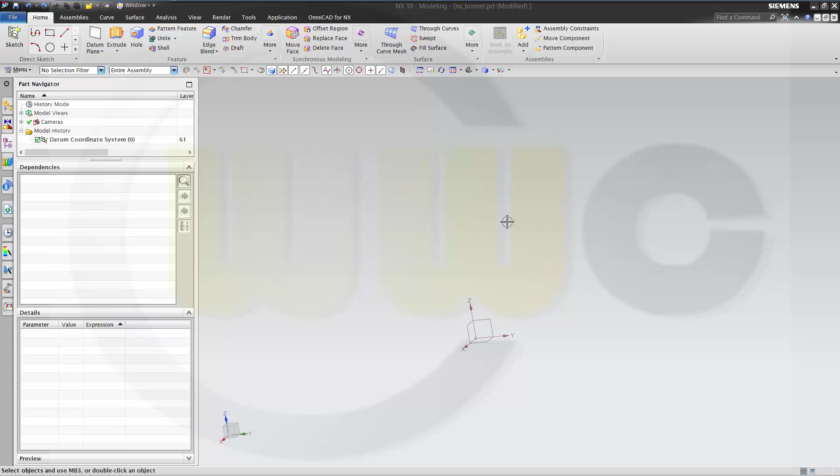At first I need some reference planes to make things easier. So the first one should be with a distance from this one, and the first distance should be

maybe 10. Apply. The next one should be the distance from this one, 12.5, and another one from this one, 10,

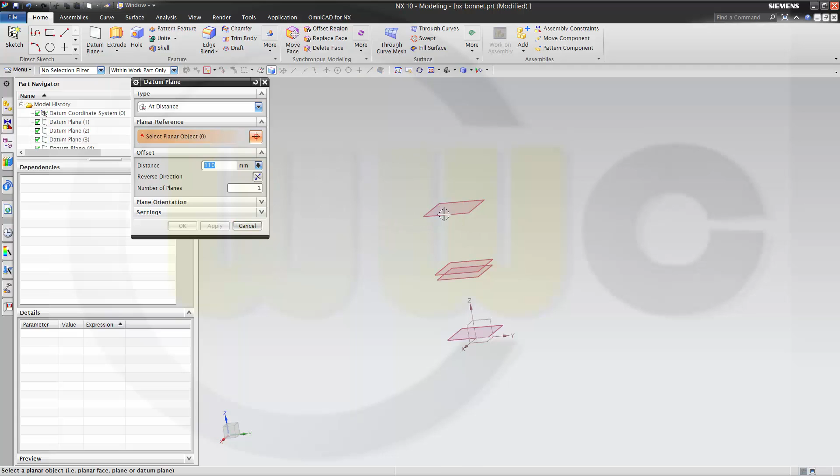and then the next one is 110, 10 again, and the last one 17.5

from this one. And okay, I could put all these in a feature group and call this ref planes.

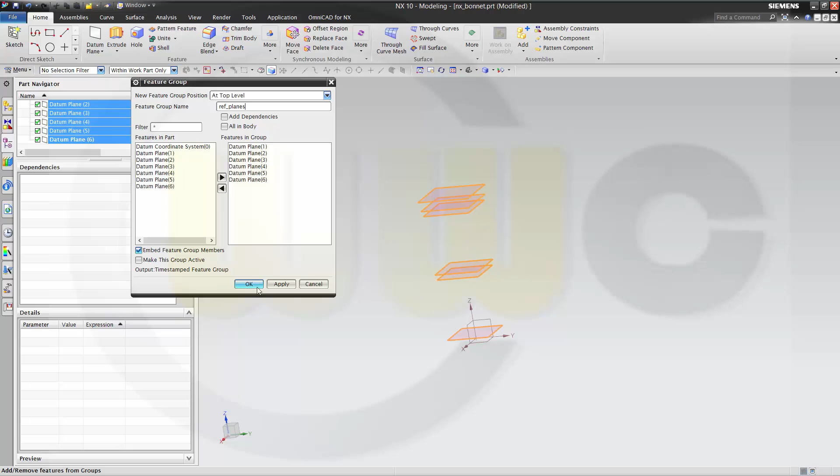Okay, next I need some sketches. Let's make a sketch on the XZ plane.

Okay, and this should be an arc, and it looks something like this. Maybe like this. Okay, then add some constraints.

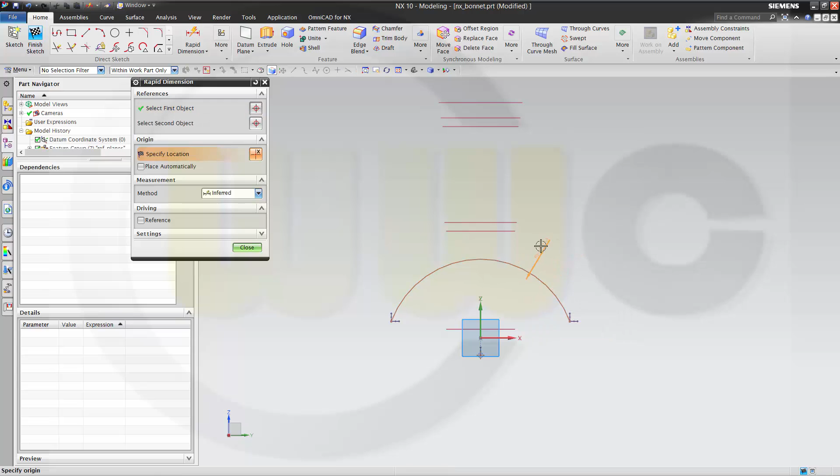So this should be aligned to the axis. Okay, and the radius should be 90.

And the center point should be on that plane, coincident. Okay, now let's move this a little bit down like this. Okay, and add some constraints from this point to that plane, coincident, and the same on this side.

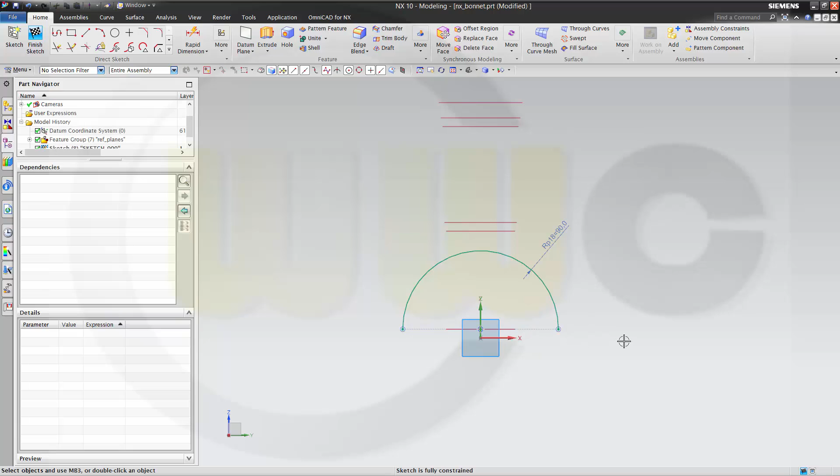Okay, finish the sketch, make an extrusion with a sketch,

make it symmetric, and it should be perhaps 80. Okay,

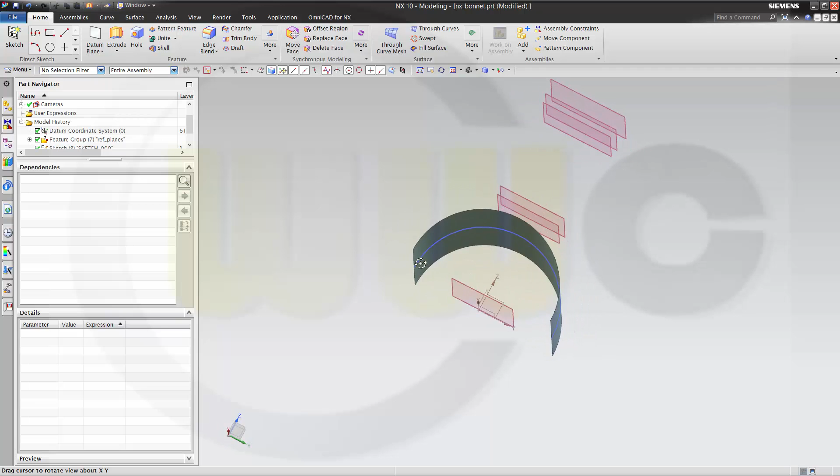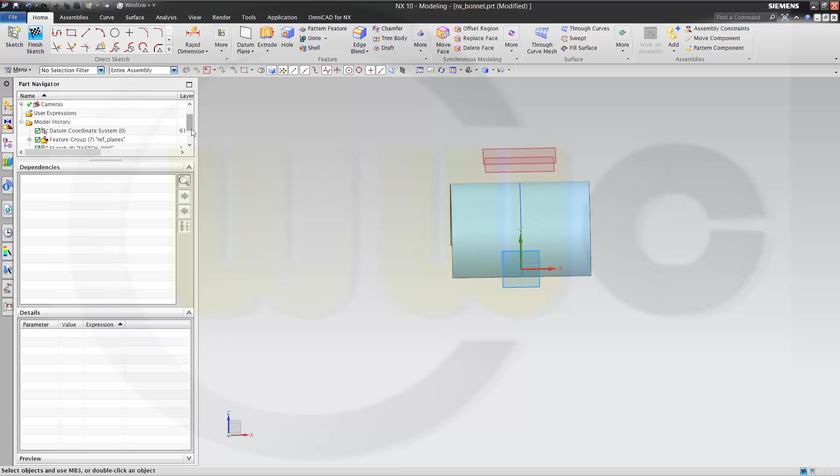another sketch on the XY plane over here. Okay, another arc. I could hide this one for the moment.

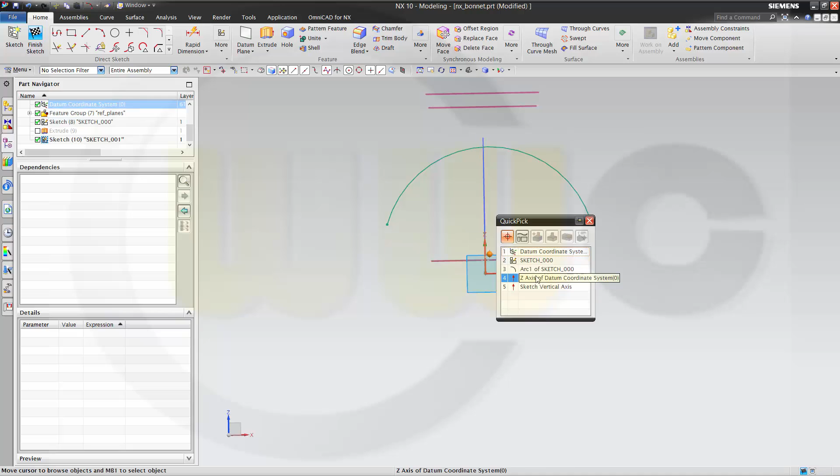Like this again. This center point should be aligned to the axis, coincident.

The radius should be 85. The distance should be from this point to that plane, 5,

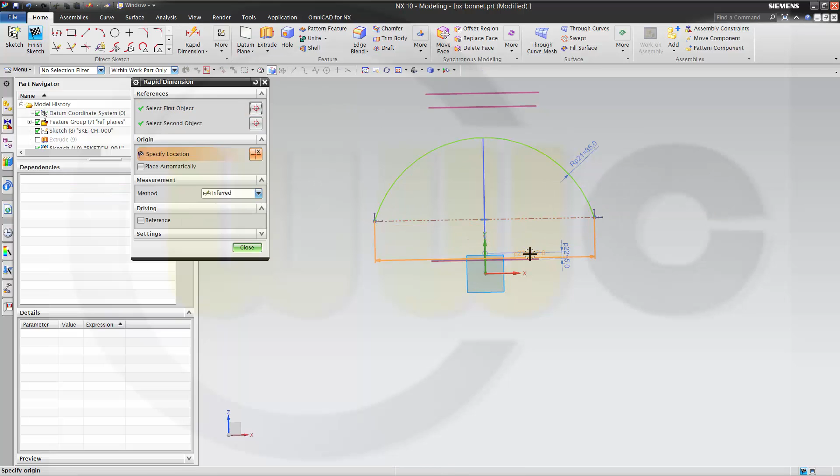and this should be fully constrained, so let's make a line like this, set it to construction and give it a dimension, maybe 30, that's okay.

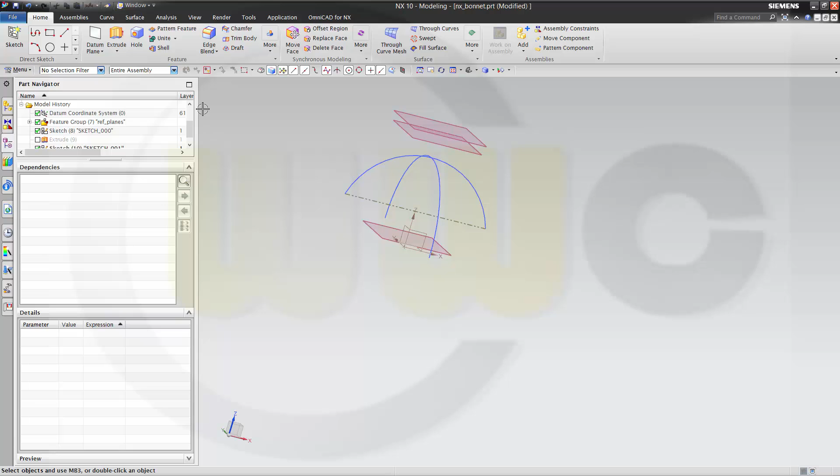Close this one, finish the sketch and make another extrude with this one.

Make it symmetric and make it 200 altogether. And okay.

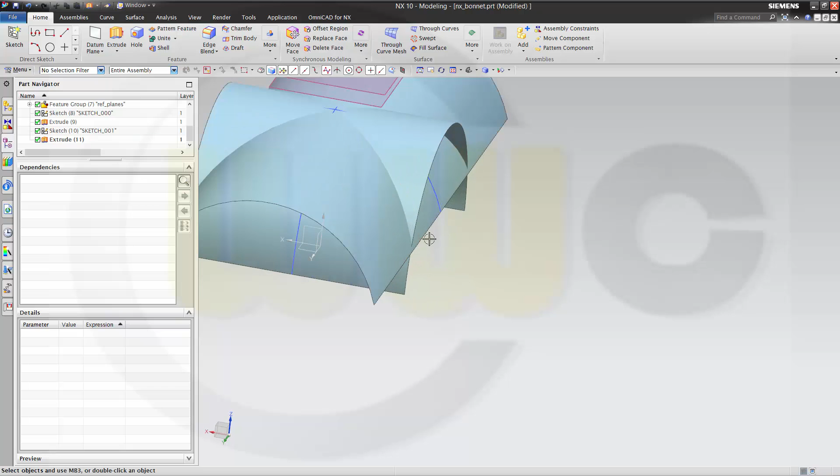Let's show this one. Just take a look, that's okay. Okay, another sketch.

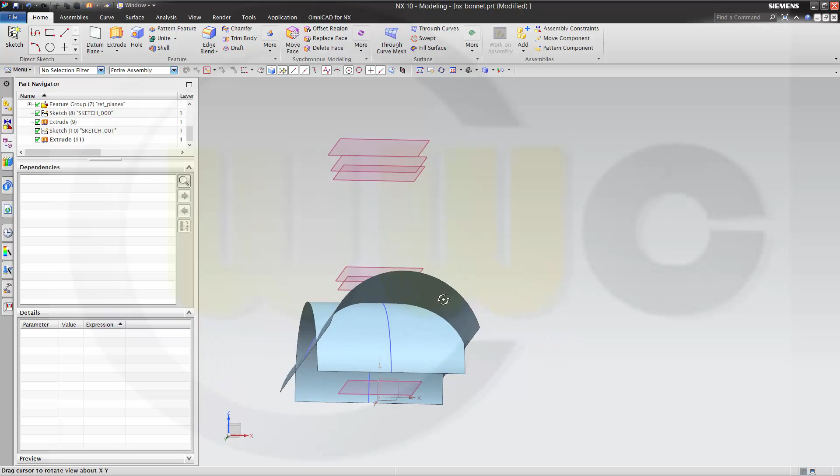Let's take a look. Should be on that plane, on the ZX plane. Okay,

and this should be a line, maybe like this. And this point should be on this axis.

There should be an angle between this axis and the line, and this might be 10. No, not 10, but 80, sorry. Okay,

and the distance should be 60 from this point to that point. Or 70. Okay.

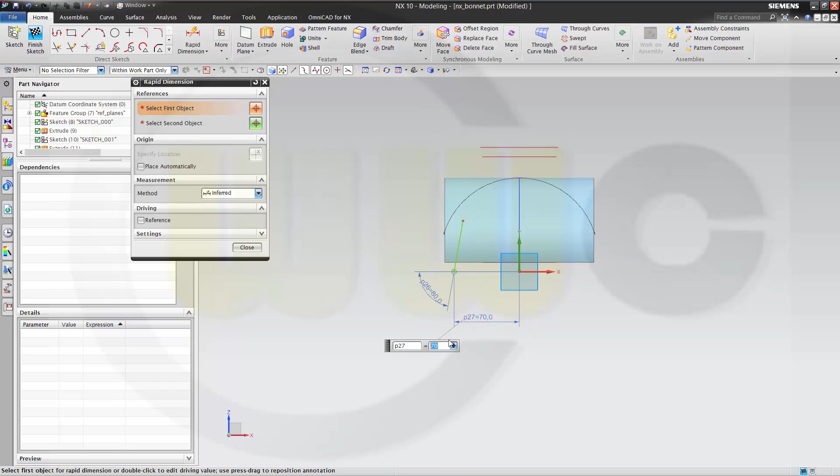Let's stretch this one a little bit. Give it a dimension. And close it.

If you want, you can make it 110. Doesn't really matter. Close. Now finish this one.

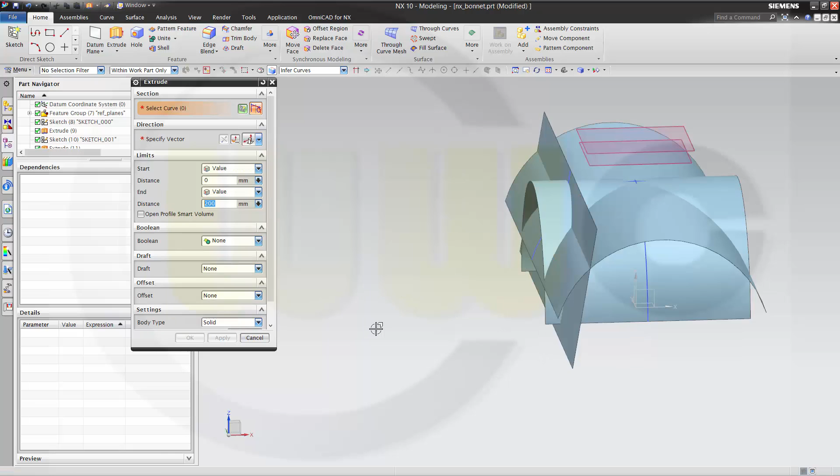Make an extrude. Make it symmetric like this and apply. And I need the same surface on the other side, so

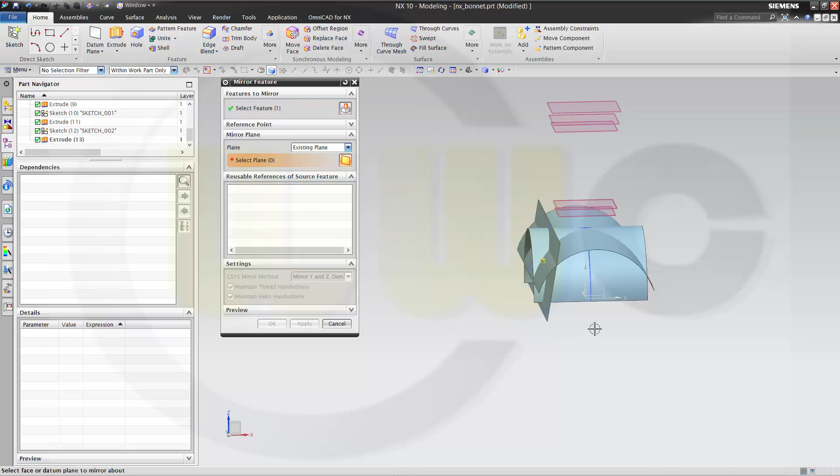let's mirror it. Go for mirror feature. I want to mirror this feature with the XZ plane.

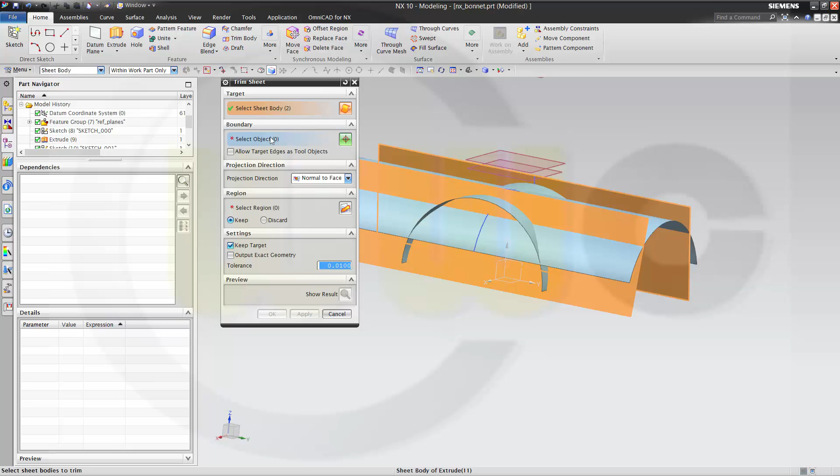Okay. Now let's try to trim this. Let's trim. Go for more, trim sheet, and I want to trim this sheet, that sheet, and I want to keep these selected regions, and I want to keep the target right now, and I want to trim it with this plane. Take a look.

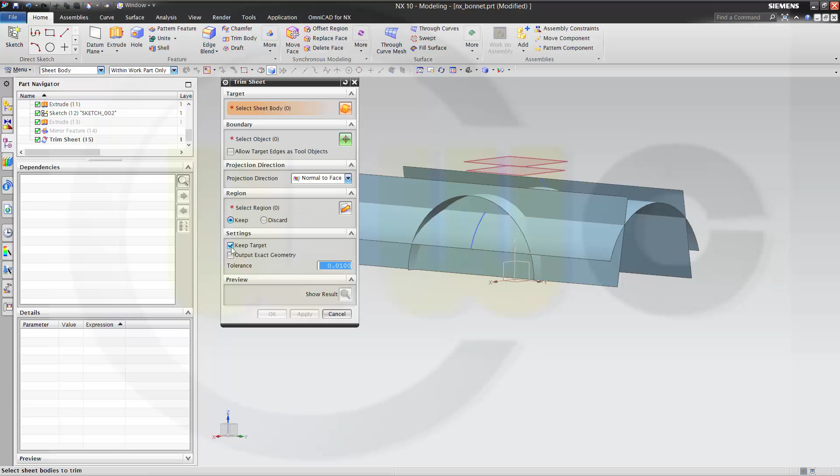Yes. Okay, and hide the targets. Okay. Once again, go for trim sheet, but right now I don't want to keep the target, so I want to trim this side, that side with this one. Okay.

Apply. And then I want to trim. Let's take a look. Yes. I want to keep the middle. And I want to trim it with this one and that one. Show the result. Yes. Apply.

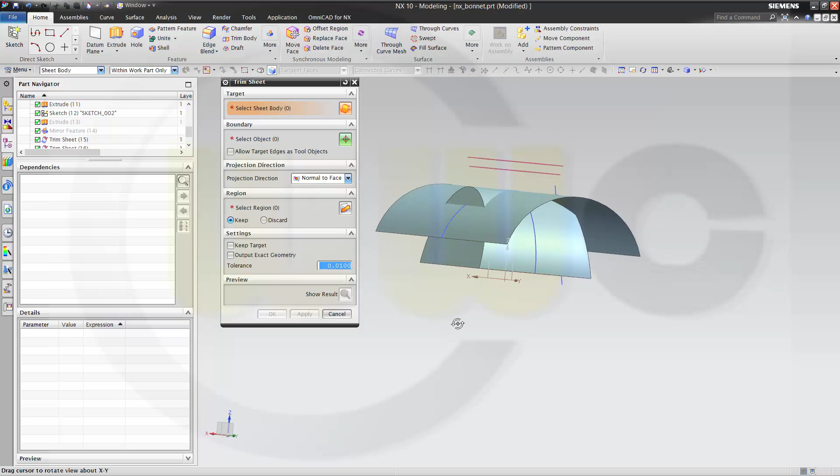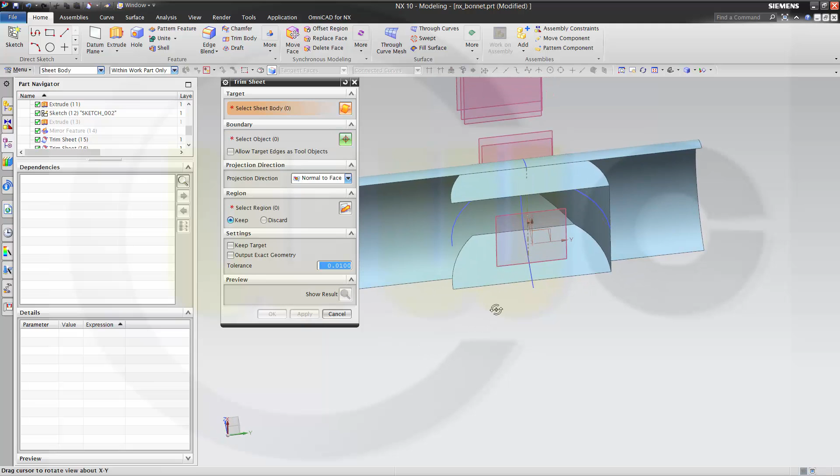Then I want to trim this one, that one, and that one with this object. Yep. Apply. Oh, I lost one. Cancel.

So maybe first sew these. So go for more, sew, this, that. Okay. Now let's try again to trim.

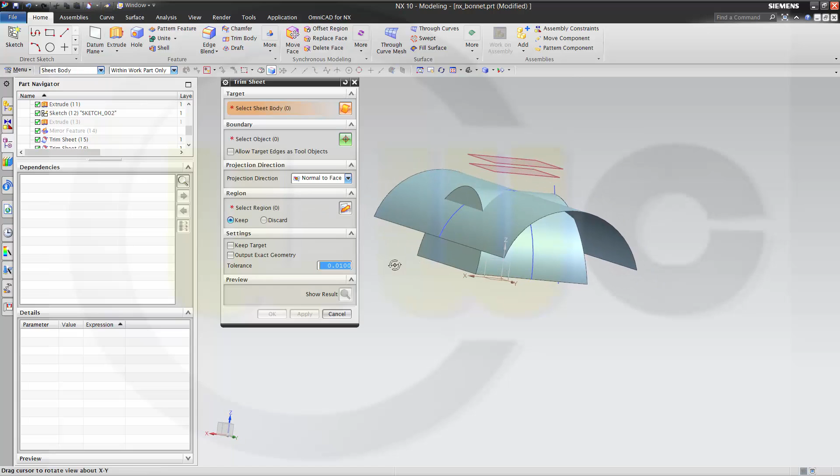I want to trim this one with that one. Show the result. This looks good. Apply.

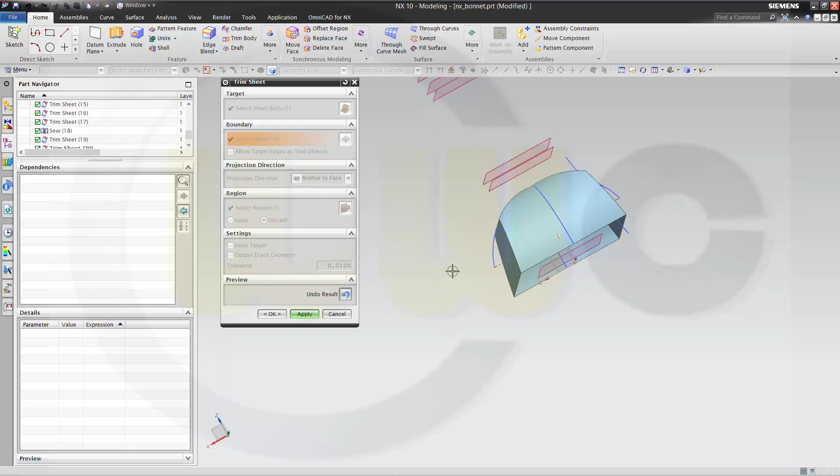And now let's take a look. Okay. I want to discard this right here, and I want to trim it this one. Show the result. Yes, and okay.

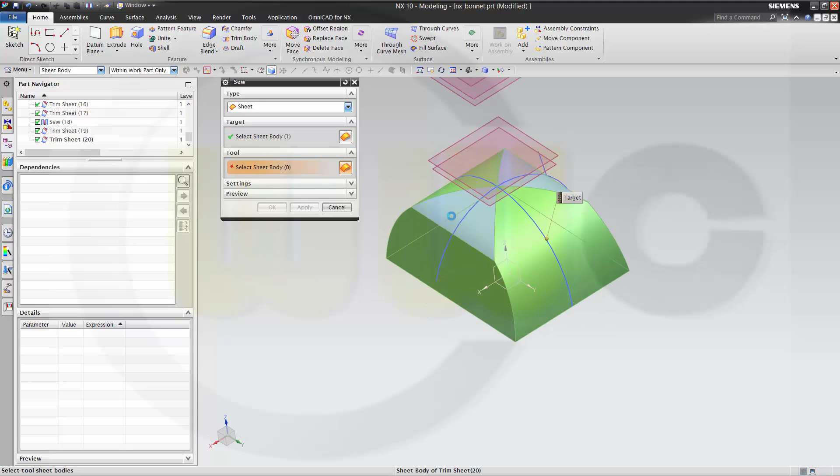Take a look. That's trim sheet 1, that's the other one. Now sew these two together. Sew this one with that one and that one over here. And okay.

Next, I need an edge blend. This should be 20, yes, okay. This edge, that edge, this edge, this one, that one, that one, and these 4. Okay.

Looks very nice. So next I want to turn this in a solid. Let's go for a bounded plane.

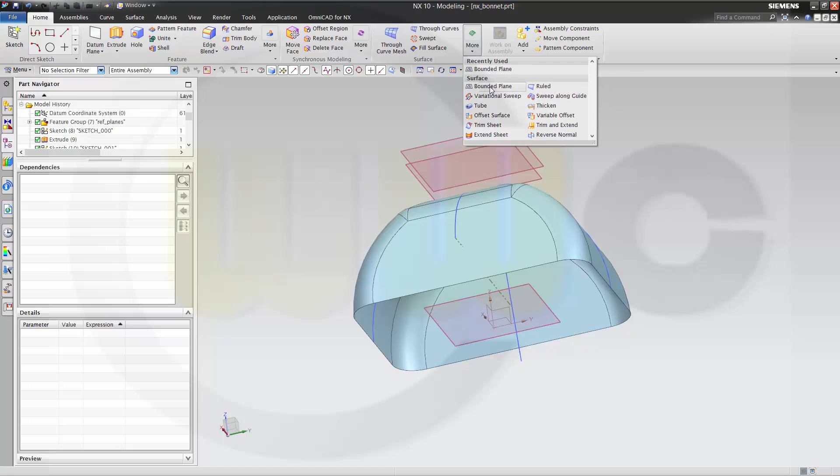Should be here, bounded plane right here, yes. Select the curve. That's the... Now I got this face.

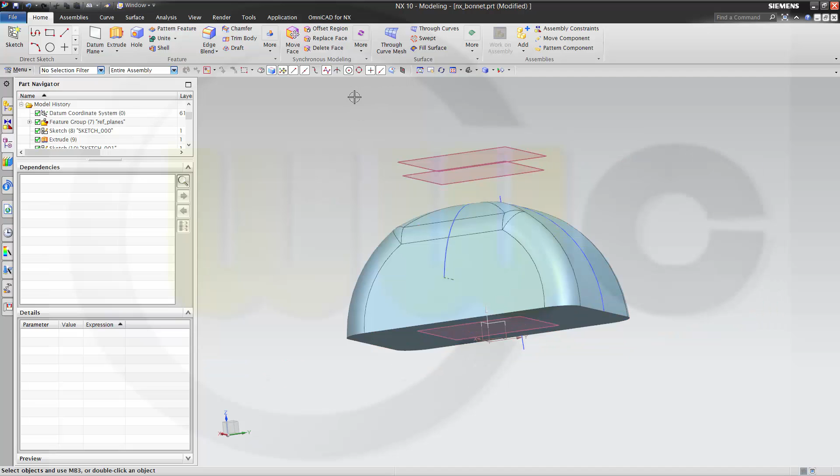If I sew these faces, I will get a solid body. So go for more and sew this one and that one, and okay. Just to check it, you could, for example, trim it or go to view, a clipped section. Like this, and see it's a solid.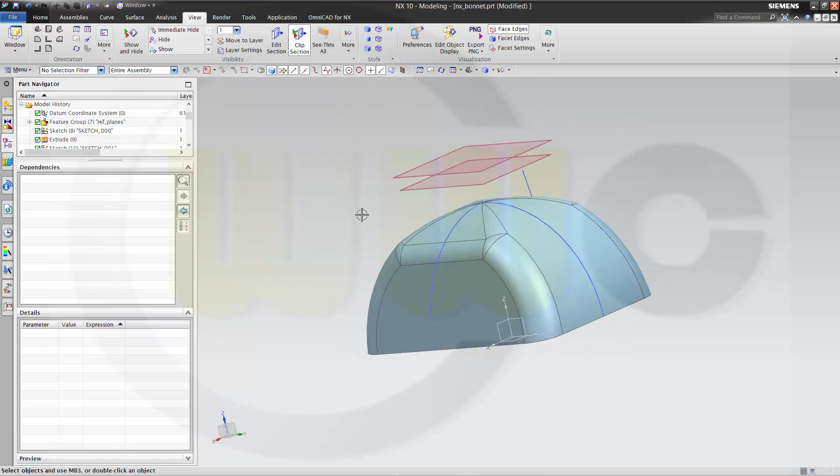Okay, next I need a sketch, maybe on this plane. Okay, and this should be an ellipse.

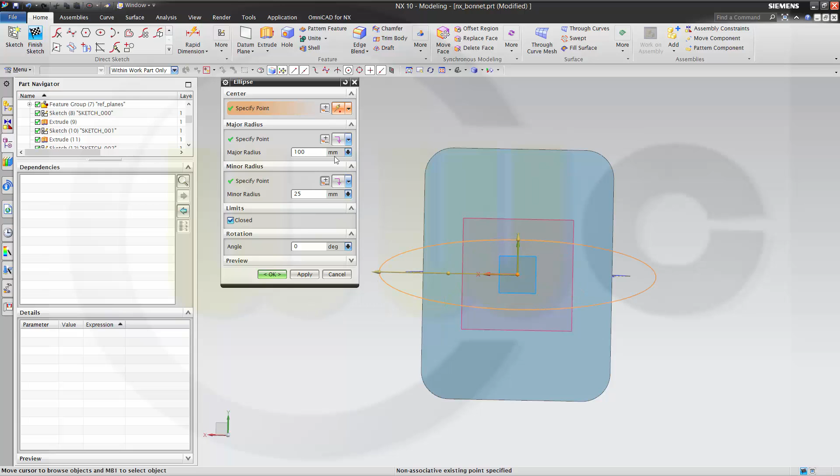Yes, center should be right here. The major radius should be in that direction, should be 200, so it's 100 the radius, and the other one should be 50, and the angle 0. Okay,

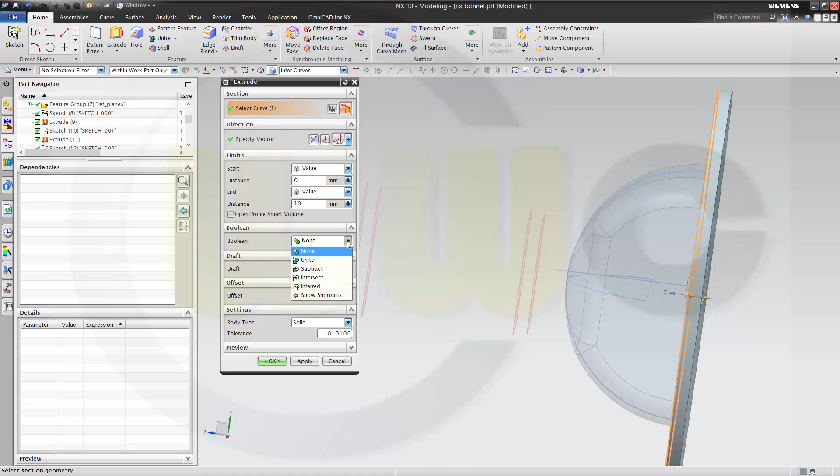make an extrude, finish the sketch, make an extrude with this sketch in the other direction like this, and I could unite it with this one. Okay,

now let's make a shell and hope it works, otherwise it's 10 and it should be removed. This one should be removed. Not really.

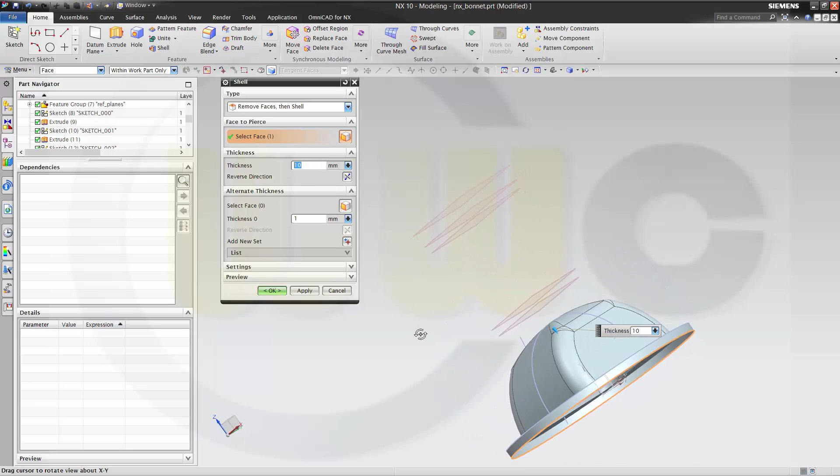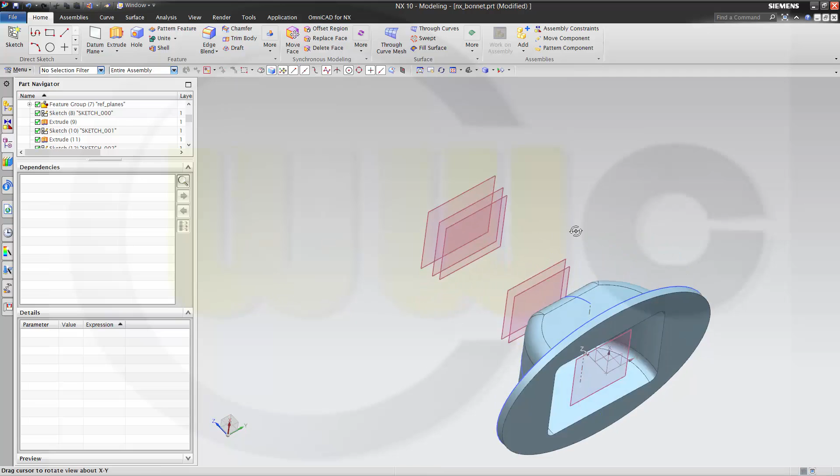And alternate thickness should be applied to. This face, and that should be yeah, looks nice.

And I could put this all together in the feature group.